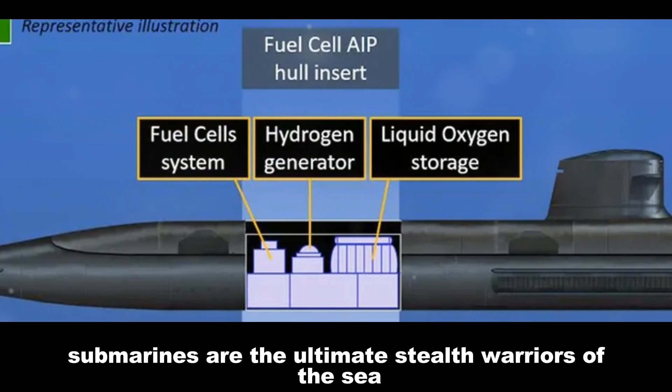AIP: Breathing Life into Silent Hunters, written by Shiv Arora. Submarines are the ultimate stealth warriors of the sea. Their ability to operate undetected makes them a formidable force. However, conventional diesel-electric submarines have a critical weakness. They need to surface regularly to run their diesel engines and recharge their batteries. This surfacing exposes them to detection, compromising their stealth.

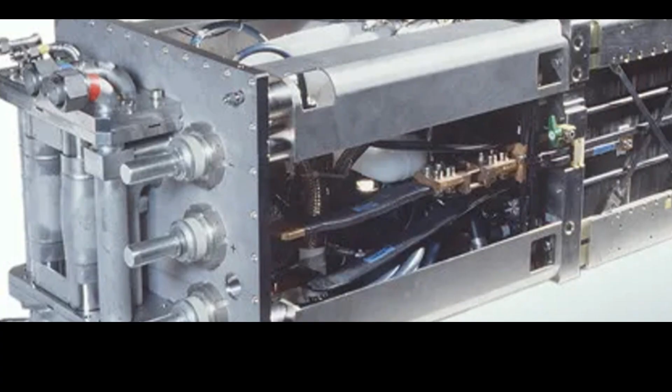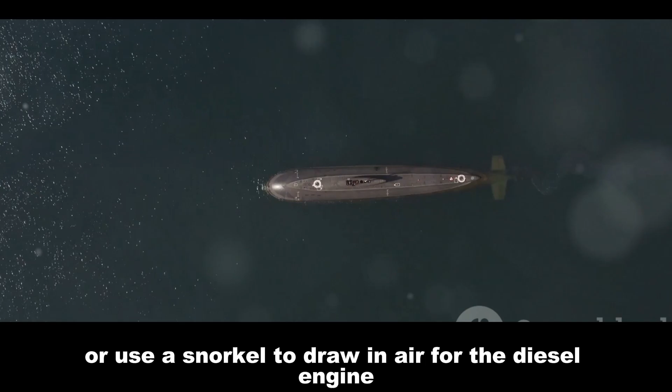This is where air-independent propulsion, or AIP systems, come into play. AIP allows submarines to operate submerged for extended periods. This significantly enhances their stealth and operational capabilities. Traditional diesel-electric submarines are heavily reliant on their noisy diesel engines for surface propulsion and battery charging. This dependence on air limits their submerged endurance to a matter of days. Once the batteries are depleted, the submarine must surface or use a snorkel to draw in air for the diesel engines. This need to surface makes them vulnerable to detection.

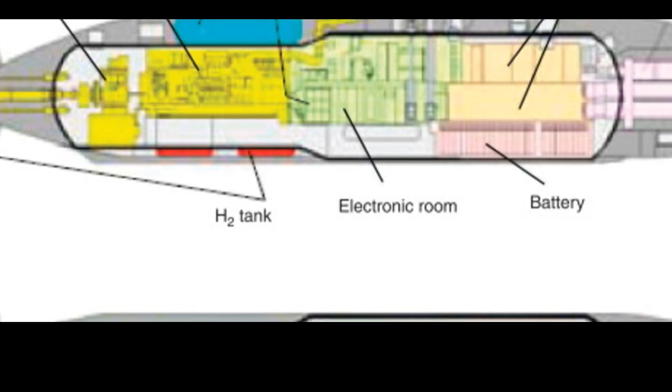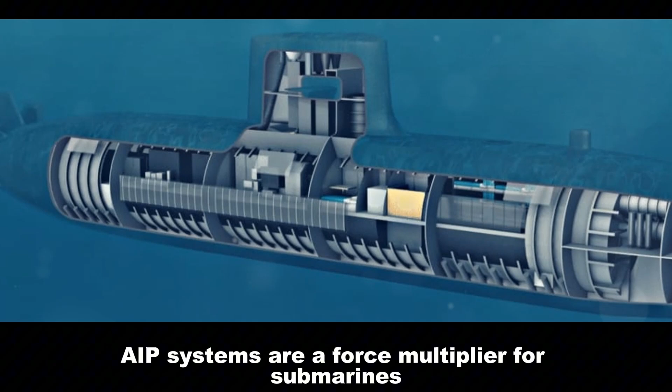AIP systems address this limitation by providing an alternative source of power. This allows the submarine to generate electricity for propulsion and other systems while remaining submerged. By reducing the need to surface, AIP systems dramatically increase a submarine's underwater endurance. This can extend their missions from days to weeks. In essence, AIP systems are a force multiplier for submarines. They are a game changer in underwater warfare.

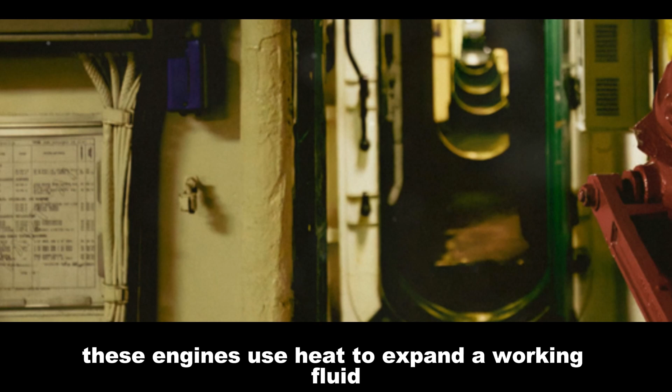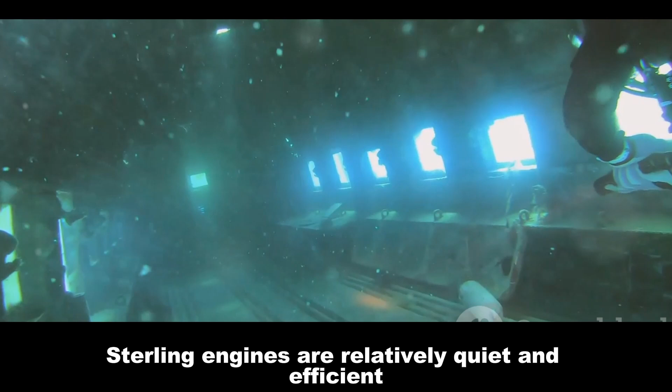The science of silent power: unpacking AIP technologies. AIP systems may sound simple in concept, but they are marvels of engineering. There are several different types of AIP systems, each with its own strengths and limitations. Let's delve into the most common types. Stirling engines. These engines use heat to expand a working fluid, typically helium or nitrogen. The expansion and contraction of this fluid drive pistons, which in turn generate electricity. Stirling engines are relatively quiet and efficient. However, they require complex and bulky machinery.

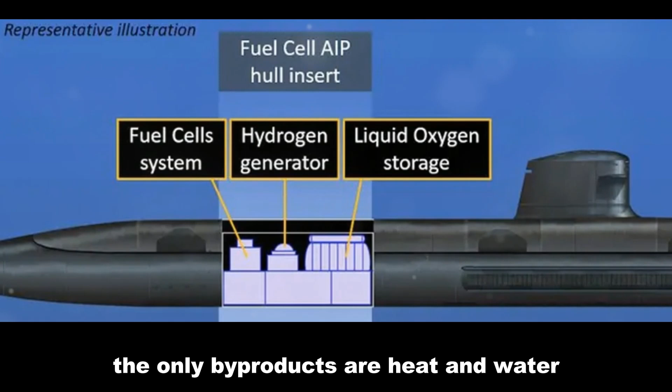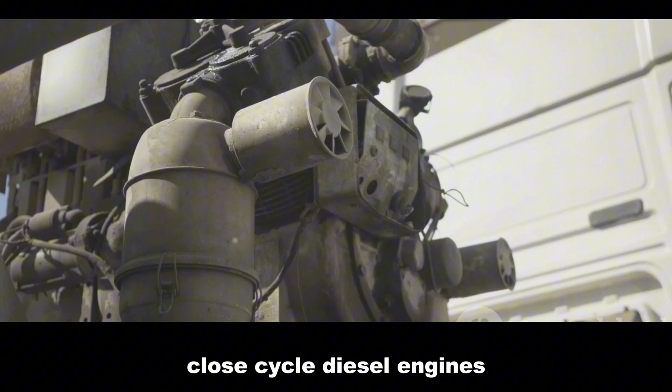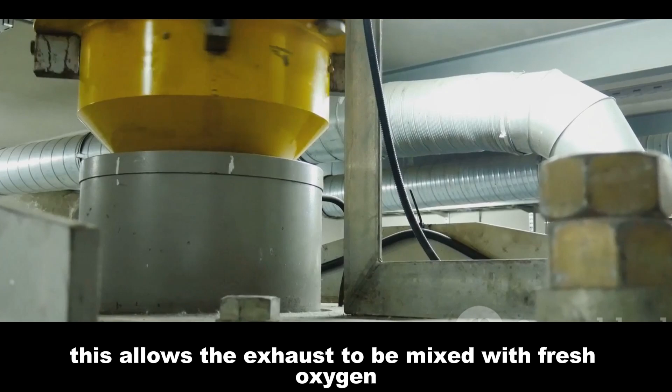Fuel cells. This technology utilizes the electrochemical reaction between hydrogen and oxygen to generate electricity. The only byproducts are heat and water, making fuel cells extremely quiet and environmentally friendly. However, storing hydrogen can be challenging and requires specialized infrastructure. Closed-cycle diesel engines. These engines operate in a closed loop. They use a chemical process to remove carbon dioxide from the exhaust gases. This allows the exhaust to be mixed with fresh oxygen and fed back into the engine for combustion. This cycle eliminates the need for atmospheric air. However, closed-cycle diesel engines are relatively noisy and less efficient than other AIP systems.

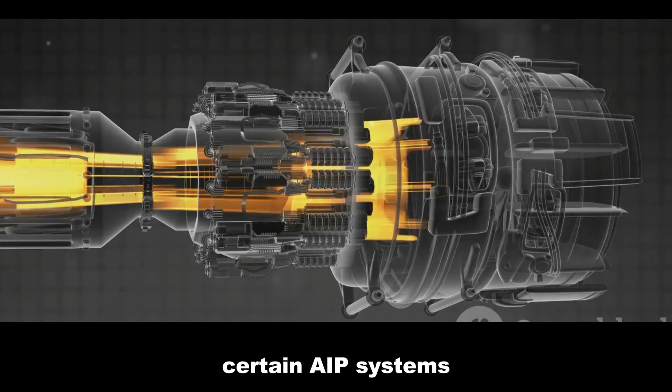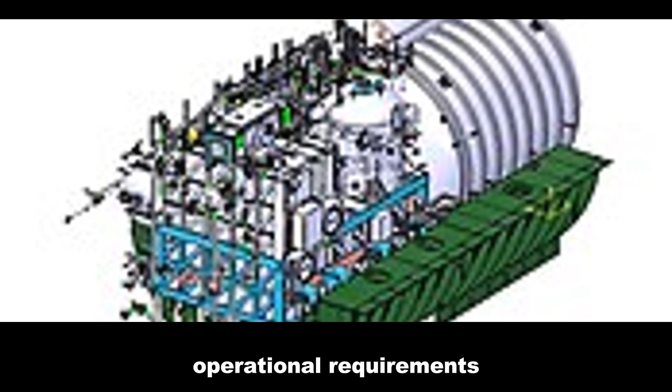Thermal engines. Certain AIP systems utilize stored thermal energy to generate steam. This steam, in turn, drives a turbine to produce electricity. These systems are simple and reliable, but have limited endurance compared to other AIP options. Each AIP technology has its own set of advantages and drawbacks. The choice of AIP system for a particular submarine class depends on various factors. These include cost, complexity, operational requirements, and the existing industrial base of the country.

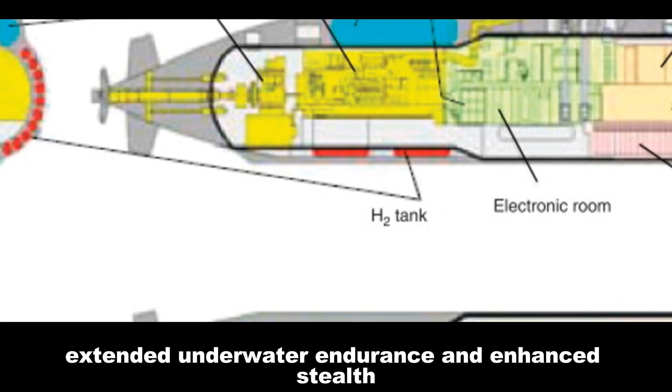The underwater advantage: endurance and stealth. The advantages offered by AIP systems are significant, fundamentally altering how submarines operate and fight. Two key benefits stand out: extended underwater endurance and enhanced stealth. The ability to remain submerged for extended periods is perhaps the most significant advantage of AIP-equipped submarines. While conventional diesel-electric submarines can only stay submerged for a few days at a time, AIP submarines can remain underwater for weeks, even months, without surfacing. This extended endurance provides a tactical edge in several ways.

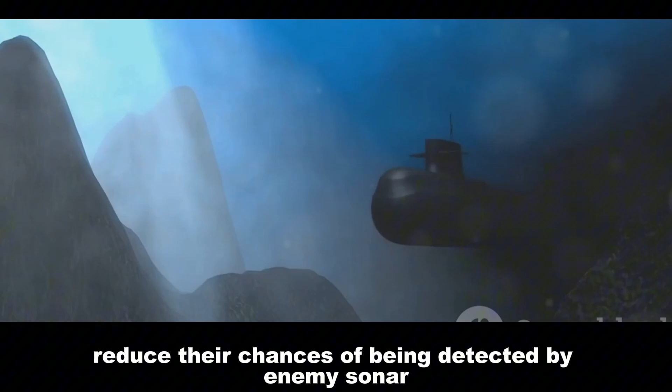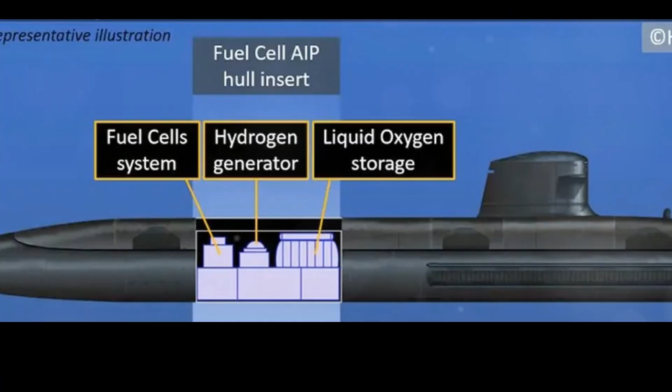Firstly, it dramatically increases their stealth and survivability. By minimizing the need to surface or snorkel, AIP submarines reduce their chances of being detected by enemy sonar, radar, or maritime patrol aircraft. This stealth is crucial in modern naval warfare, where detection often means destruction. Secondly, extended endurance allows AIP submarines to undertake longer missions and patrol areas of interest for more extended periods. This is particularly important in the vast expanses of the Indian Ocean, where India's strategic interests are spread across a wide geographical area. Finally, AIP submarines can operate more flexibly in challenging underwater environments.

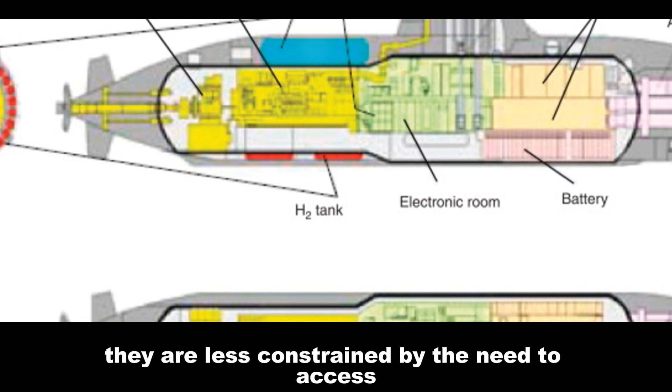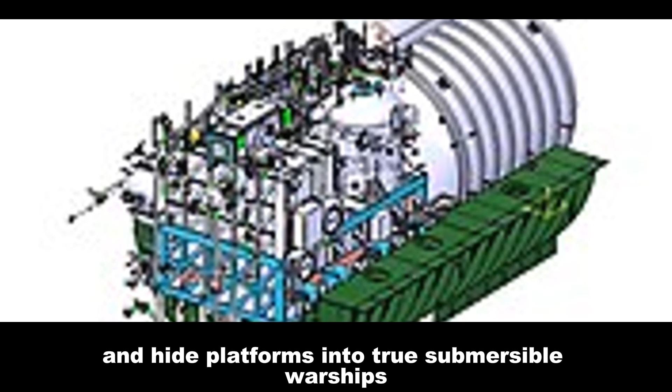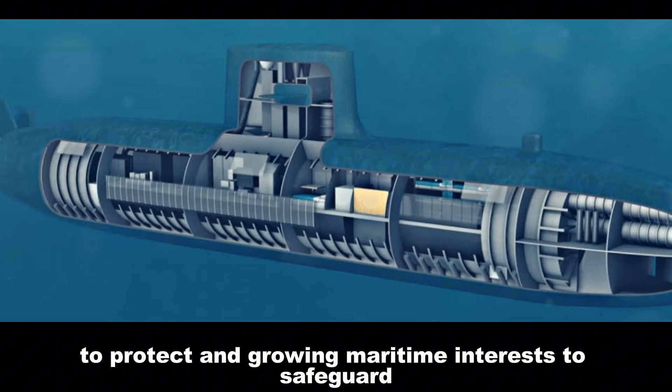They are less constrained by the need to access the surface for air, allowing them to exploit underwater terrain features and oceanographic conditions to their advantage. This makes them more difficult to track and allows them to launch surprise attacks. In essence, AIP technology transforms submarines from short-range, sprint and hide platforms into true submersible warships, capable of sustained, independent operations far from their home bases. This capability is crucial for a nation like India, with a vast coastline to protect and growing maritime interests to safeguard.

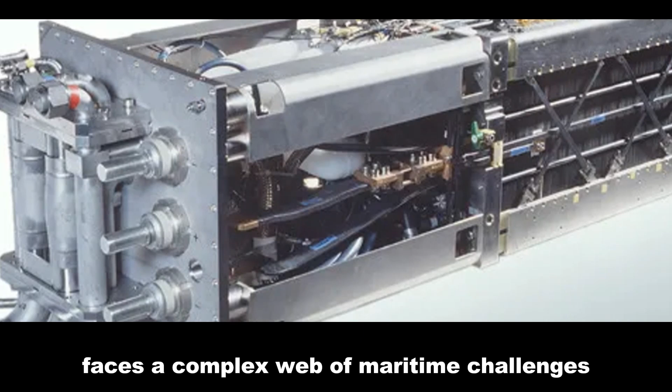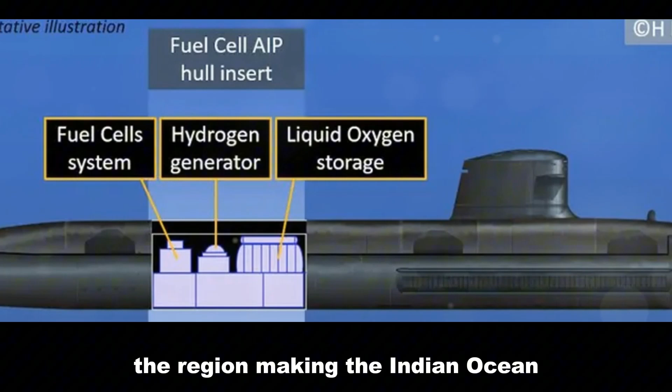Guardians of the Deep: AIP and India's strategic imperatives. India, with its extensive coastline and a growing dependence on sea lanes for trade and energy security, faces a complex web of maritime challenges. The Indian Navy recognizes the critical importance of submarines in maintaining maritime dominance. AIP systems are not just a technological leap, but a strategic imperative for India. The Indian Ocean is a region of immense strategic significance. It is a conduit for global trade and energy flows, and several regional powers, including China, are vying for influence. This competition has led to increased naval activity in the region, making the Indian Ocean a complex and contested maritime domain.

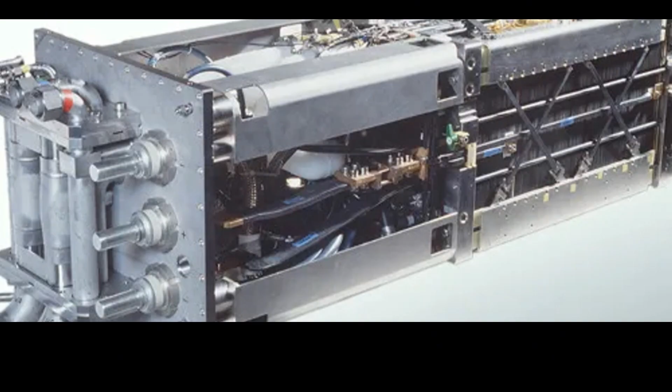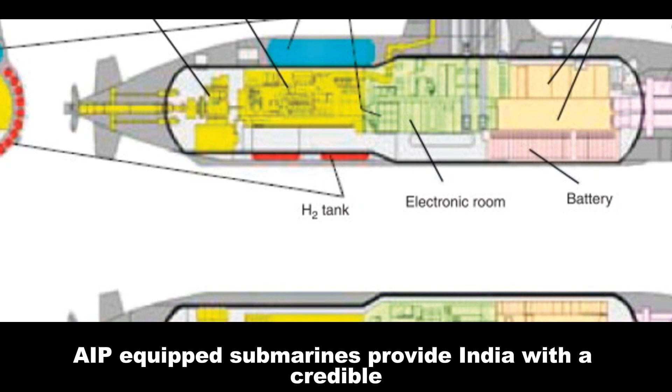India's maritime security strategy hinges on the ability to protect its sea lanes of communication, or SLOCs. These are the lifelines of India's economy, carrying vital energy supplies and trade goods. Submarines, with their stealth and ability to operate undetected for extended periods, are ideally suited for patrolling these SLOCs and deterring any hostile actions. Furthermore, AIP-equipped submarines provide India with a credible second strike capability. They can act as a deterrent against nuclear blackmail. This is particularly relevant in the context of Pakistan's developing naval capabilities and China's growing assertiveness in the region.

The stealth and endurance offered by AIP systems allow Indian submarines to operate discreetly in areas of interest, gathering critical intelligence and maintaining a vigilant watch over potential adversaries. This capability is crucial for early warning and timely response to evolving threats.